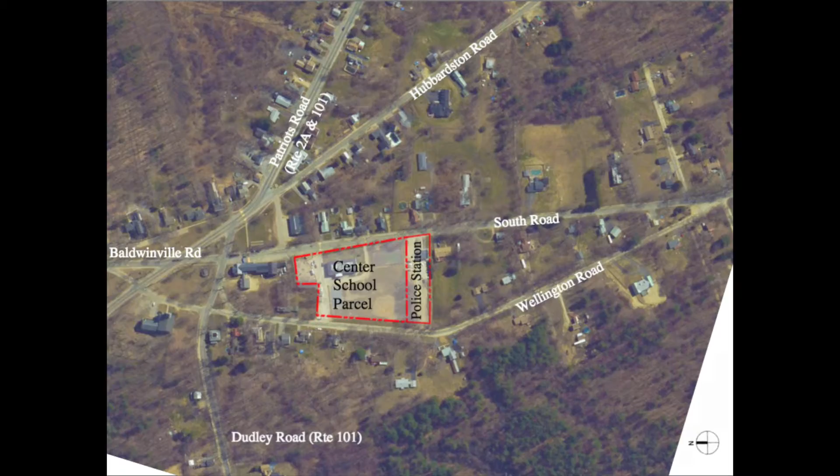We'll relocate the Gladys Salame Playground in totality across the bus drive closer to the school to make it a much safer access for the children using the playground. We'll also create a second pre-K and K playground area immediately adjacent to the kindergarten and pre-kindergarten classrooms, so that their access is much more controlled with easy observation of the youngest element of the school.

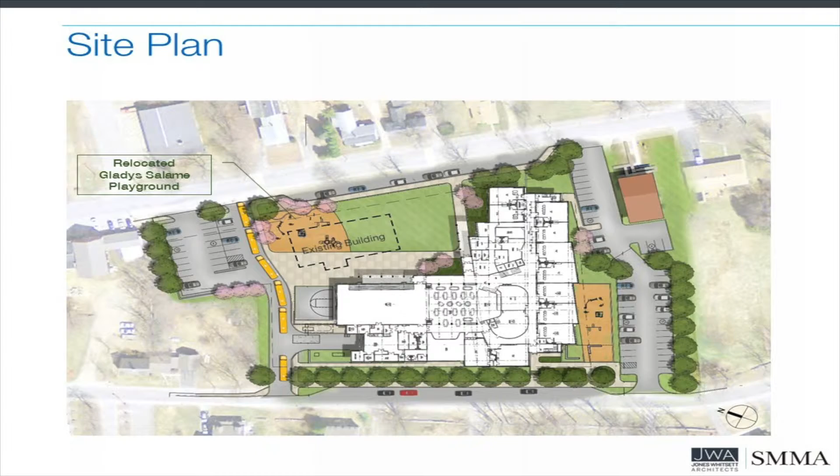We'll be providing 61 parking spaces on the site, which will be more than enough to accommodate all the teachers and staff as well as visitors.

In looking at the overall traffic circulation as it relates to the school and the town center, we have met with the town public safety officials in designing the overall traffic circulation plan and utilizing their recommendation, which is an excellent recommendation as it relates to traffic circulation.

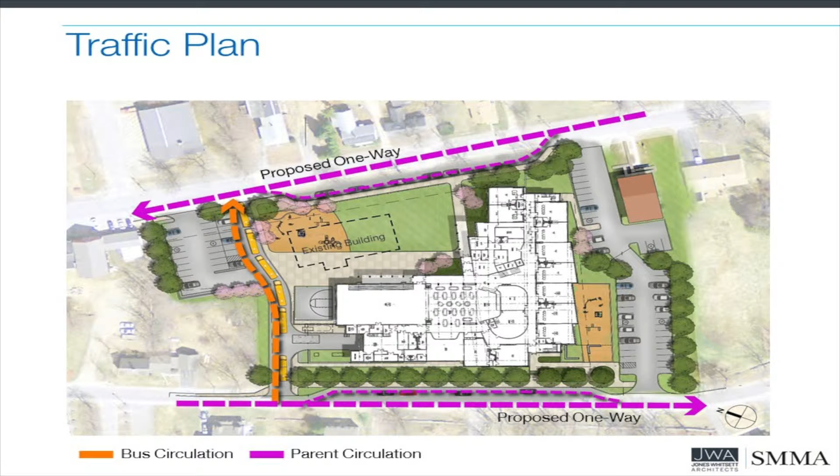South Road and Wellington Road will be converted to one-way traffic, and that does several things. Not only does it improve the current traffic congestion that happens at the site and the surrounding area today, but it helps in the long term. By having South Road go in a northerly direction and Wellington in a southerly direction, it will allow that traffic in those roadways to get their maximum use.

With that, we'll have pullovers on South Road and Wellington Road as well. Those pullovers, which will be used by parents for dropping off and picking up students, will bring those cars out of the traffic circulation, so that we can keep as much of the South Road and Wellington Road traffic circulation active and moving.

Like today's circulation, the buses will come through the site and drop off right immediately adjacent to the building. They'll come down Wellington, drop off adjacent to the building, and then leave on South. This allows the students to go right from the bus drop-off into the building entry, or in inclement weather, right into the building gymnasium to get them out of the weather and safely into the school. It also allows a staging area during winter or inclement weather periods for students leaving the building, for a much more organized way of bus assembly and loading.

Part of the overall traffic work for the project will be to reconfigure the Wellington Road and South Road intersection. As you know, that is a very acute angle intersection right now, which is very hard to navigate. So as part of the project, we'll be straightening out that intersection to really make it much more usable for the community.

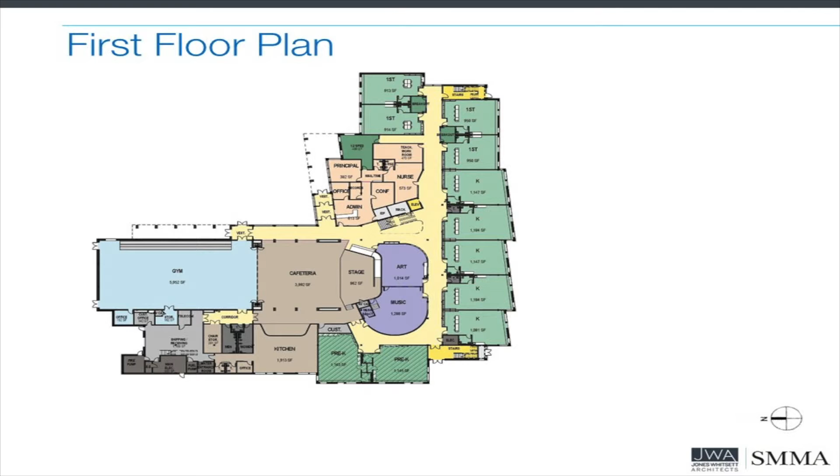The building entry itself is also very secure. It's immediately adjacent to the administration wing, so that we have much elevated control and security as it relates to students entering and exiting the building.

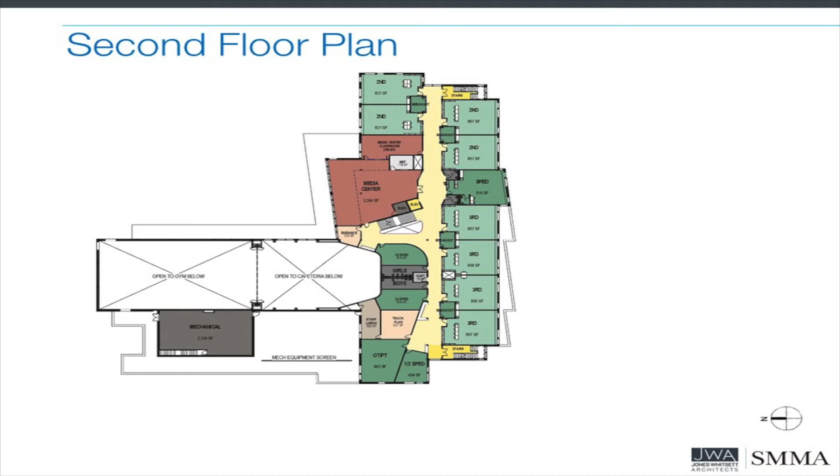On the second floor, we have grades 2 and 3, as well as the library. Now, the library, which you currently don't have at either Center or Baldwinville, is really the heart of the school. It has a significant amount of technology, and a significant amount of reading and passive research areas for those younger students that can get oriented right into your program and curriculum.

On the third floor would be grades 4 and 5.

As far as the building systems that will be driving the school, the building committee has been very efficient and economical in their directives to us, as it relates to making the building easily maintained, long-term operational, and lowest cost possible. So you're ending up with a building that is significantly more efficient and environmentally friendly than your current facilities, providing the natural light and conditioned spaces that are so needed.

Some of the spaces within the building will be fully air conditioned. Those are the spaces that will be used for summer school, and the rest of the educational spaces will be partially air conditioned, providing tempered air in the late spring and early fall, when sometimes in your current facilities spaces reach up to 90 degrees, which is just not conducive to learning.

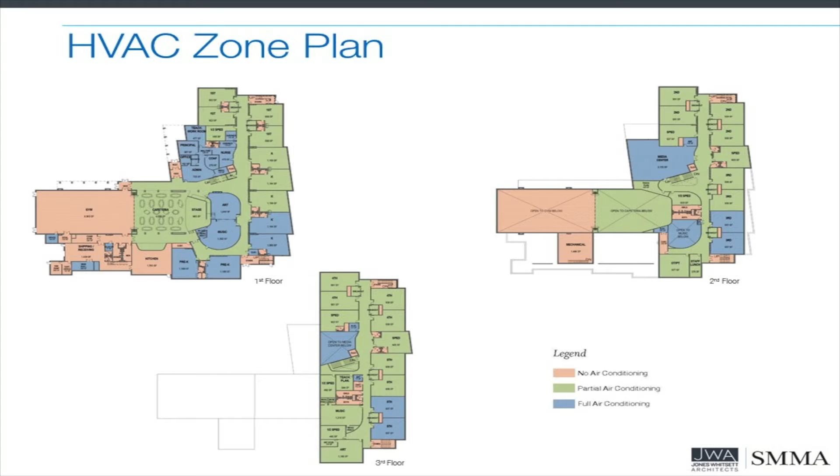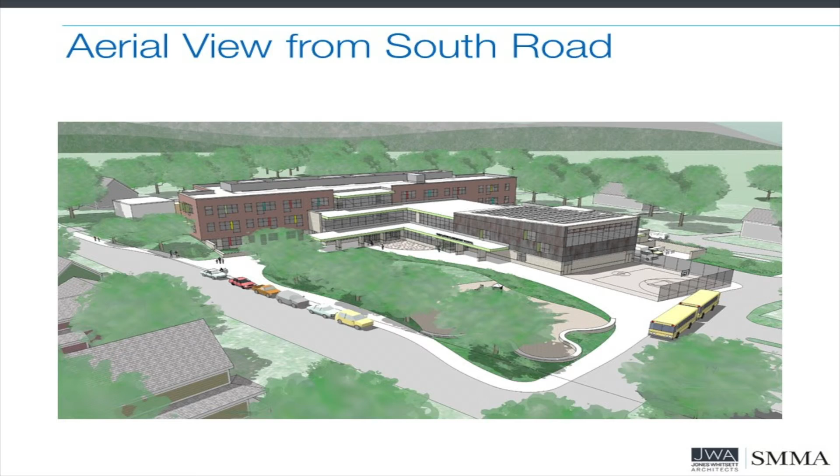Looking at the building's exterior, we've positioned the 3-story part of the building closest to the police station property, furthest away from the town center. We believe this allows a lot of site utilization to happen, but also minimizes the impact to the neighborhood by placing the largest part of the building furthest from the town center and perpendicular to South Road and Wellington Road, so the short ends of the building are viewed from the street level.

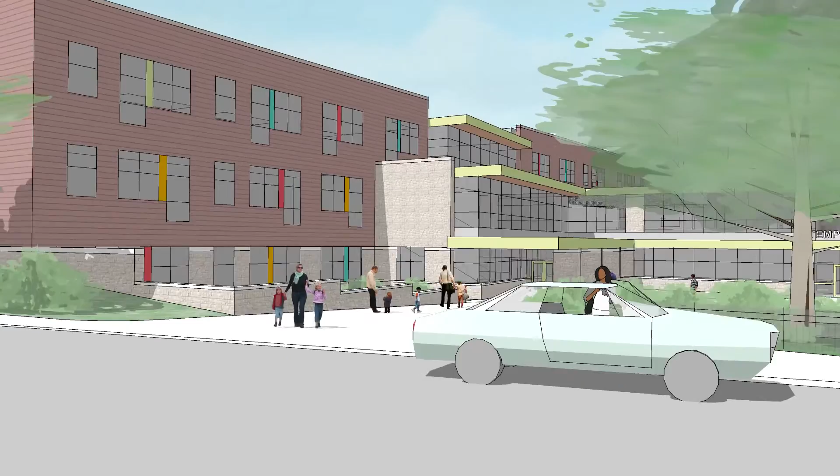We have a short video that will go through. This is a view starting from South Road looking at the building entry. As you can see, the building's 3-story element, the classroom wing, is to the rear of the site.

This is a view now as we're looking from town center towards the building. The gymnasium is in the foreground, and it's photovoltaic panel ready for future installation.

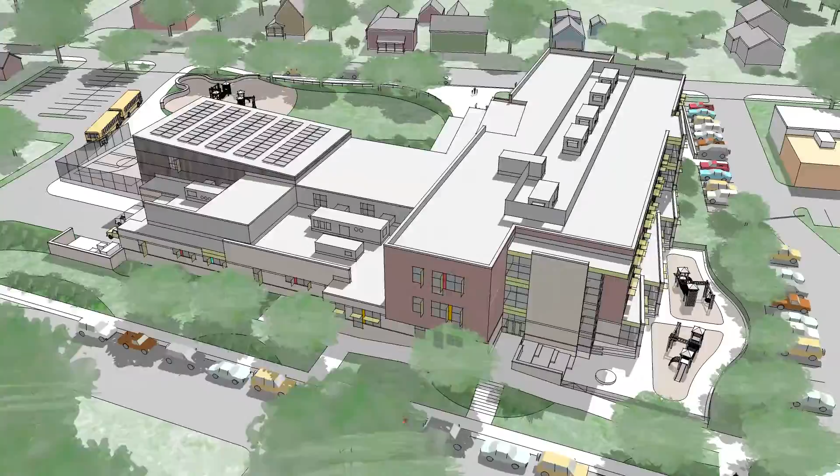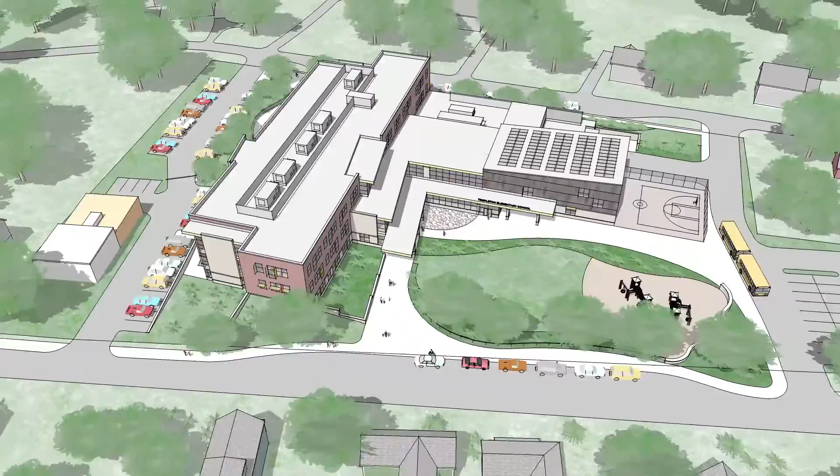Looking at the building now coming from the police property, all the exterior materials are very durable, and they're designed specifically to fit in with the neighborhood and the town center.

Lastly, this is a more detailed rendering of the front entry of the building, where the building materials and the size and orientation of the masses really fit in with the neighborhood and reflect that character.